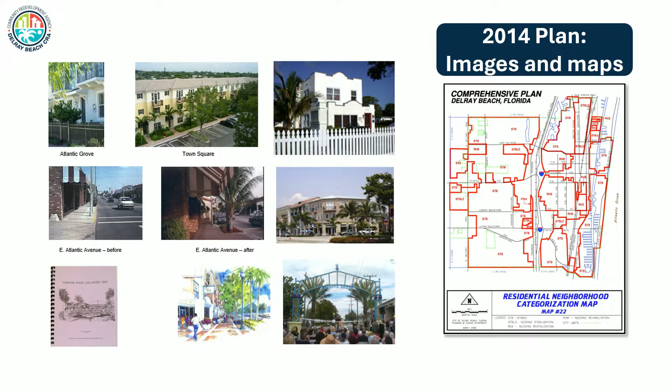Here's a summary of the updates to the maps, graphics, and project progress. So you'll see the cover — we changed that from the existing current plan of 2014 to the 2026 version. And here are some of the images in the maps and the updates.

So we still have the removal of slum and blight, land use, development investment. We changed that from economic development. We had a couple different sections that referred to housing, so we tied that all into one and titled it housing. We also have infrastructure and mobility improvements, public asset and facilities, and policing innovation is the one that is new that we added.

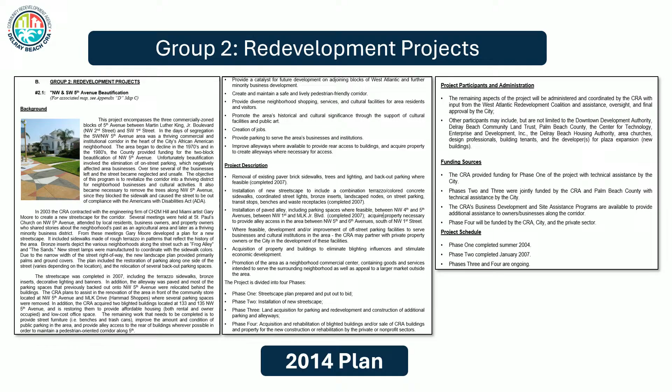And these are the redevelopment projects — this is what the current 2014 plan has for redevelopment projects. And then this is the table I just went through, in a larger format, where you can see the checks showing which goal each project is meeting.

Can you zoom in on those at all? I don't think so. Can I zoom? No? I don't think I know. Okay.

It's in the backup if you have the plan. It's in the backup of the plan.

All right, and the governing body. So the CRA was established in 1985. Palm Beach County also gave a delegation to the City of Delray Beach to oversee our CRA wholly and completely. So as a result, the Delray Beach CRA's governing body is given authorization to adopt by majority vote the 2026 amendment to the CRA redevelopment plan.

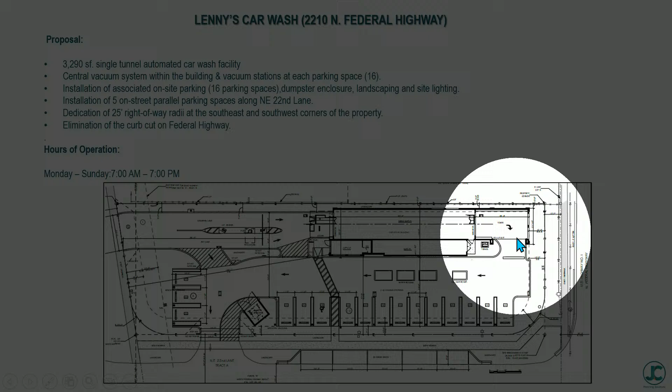There's also an alternate - if somebody decides they don't want to after they go to the gate, they can circulate out. So it's a one-way circulation system, perpendicular, with one point of egress. This is a little wider due to the waste management vehicles egressing in that location.

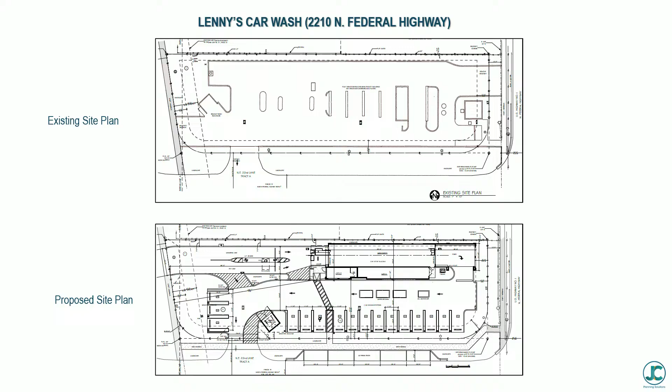There you see the existing site plan, and then we have the proposed site plan.

Required findings with regard to the conditional use: there's consistency with the site plan and consistency with the land use map. GC is the preferred zoning district with the GC land use designation. GC allows wash establishments, facilities for vehicles, as a conditional use. The floor area ratio is 0.16, the allowed max is 3.

The staff report confirms positive findings can be made with respect to the adopted level of service standards regarding concurrency, water and sewer, drainage, traffic, etc. The staff report also outlines consistency with the comp plan, specifically the neighborhoods, districts, and corridors element, the economic prosperity element, and the North Federal Highway redevelopment plan.

On the screen are some of the applicable policies that apply to this development proposal. I'm not going to go through each one - it's an excellent staff report and backup that was provided.

Compliance with the LDRs, conditional use findings 246A5. Positive findings can be made with regard to Chapter 3, as well as the findings for establishment of the conditional use - that it will not have a significantly detrimental effect on the stability of the neighborhood within which it will be located, or hinder development or redevelopment of nearby properties.

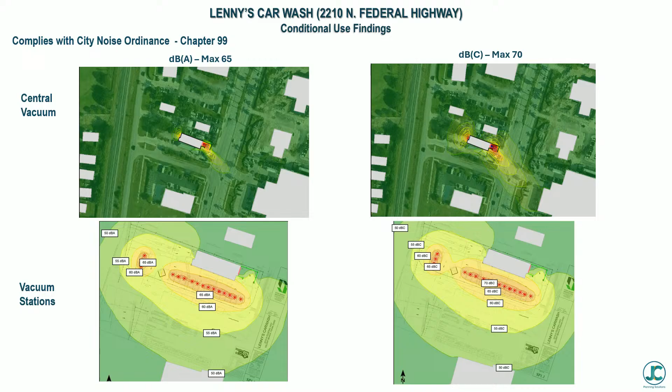As a result, once we received the staff report, there was some question with regard to the vacuum stations at individual spaces, so we had an additional analysis prepared. My apologies for not sending the staff the report - we'll ensure they receive it before City Commission, with a positive recommendation we hope. This particular analysis, on the bottom part, indicates those will not exceed the dBA either. So it's all in compliance with the noise ordinance, and there are no adjacent residential areas abutting, so positive findings can be made in that regard.

With regard to required findings on the site plan, the applicable standards for site plan action - positive findings can be made, listed on the screen. There's more detailed analysis in the staff report. The development proposal meets the applicable standards, and there are no identified areas of concern from the overall site configuration or proposed use on the surrounding area.

Compliance with the LDRs - it complies with the applicable standards indicated on the screen. It does allow as a conditional use outside storage, which ties in with the vacuums.

And so we've provided the evidence that those will comply with the noise ordinance and will be aesthetically appealing. With regard to the waiver analysis, we did request one, and per the LDR's.

Under 469D6D, when you have a 24-foot drive aisle, you have to have two-way traffic flow. This whole business operation is a controlled situation where you want customers coming in off of Dixie, go through the tunnel, egress on the southeast corner, and then go into the parking spaces, and from that point you exit the site. So we respectfully request in this case the one-way traffic flow.

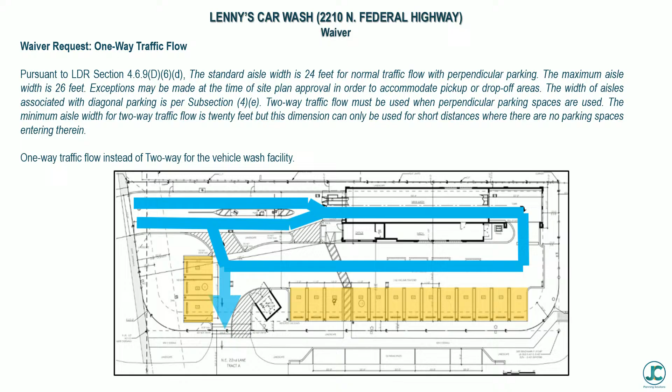We feel that positive findings can be made with 2411B5, that it would not adversely affect the neighboring area, would not significantly diminish the provision of public facilities, and shall not create an unsafe situation. This was really a controlled environment to make it a safe situation, and does not result in a grant of special privilege, in that the same waiver would be granted under similar circumstances on another property or for another applicant.

We feel it could be in a similar situation. There's not a safety concern, it controls traffic flow for customers and business operation, and does not affect the neighboring area. There are do-not-enter signs. Signage will be provided throughout the site, proper pavement markings indicating the proper flow, and do-not-enter signs off of 22nd.

The business model requires the need to provide those stations. The ideal would have been 21. It's a tight site, so we're going with 16. Typically, if you wanted to, you could have a diagonal, but we would have eliminated one or two more additional spaces. We feel as many parking spaces as we can get and accommodate the customers, the better.

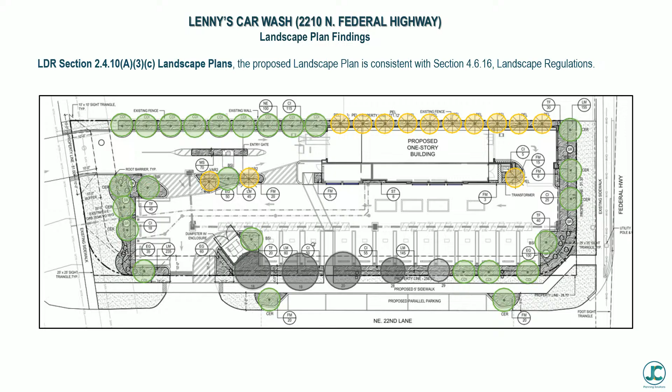And with regard to the landscaping, 2410A3C, positive findings can be made. We are preserving some of the trees along 22nd the best we can. We have our landscape architect here if there are any questions related to that. The site along the perimeter will be extensively landscaped and will be a significant enhancement to the North Federal Highway corridor.

And then with regard to the architectural elevation findings, the proposed Mediterranean Revival architectural style building, positive findings can be made for the criteria for board action with regard to 4618E1 through 3. Again, it's a very significant enhancement to the North Federal Highway corridor, repurposing and redeveloping this. It's the same use but in a different format.

It's an automated car wash facility, and we respectfully request your approval of this, or recommendation of approval of the conditional use and site plan. And that concludes my presentation. Thank you.

It's a new time record, Jeff. You're good.

Alright, so the request is for a level 4 site plan with a conditional use and waivers to allow a car wash in the GC zoning district. One waiver has been administratively approved by the city engineer, and further detail of the waivers will be provided later on the slides.

So the GC property is adjacent to other GC properties to the north and south, and automotive commercial to the east, and single family and community facilities to the west. The lot is currently occupied by a self-service car wash and is within the North Federal Highway Redevelopment and Overlay District.

Brief history: the site was annexed into the city in 1999 with a repair and truck rental shop. In 2003, the site was approved with the conditional use to have a car wash, and in 2005, the associated site plan was approved. As this is a complete demo, that is why the conditional use is now being requested again.

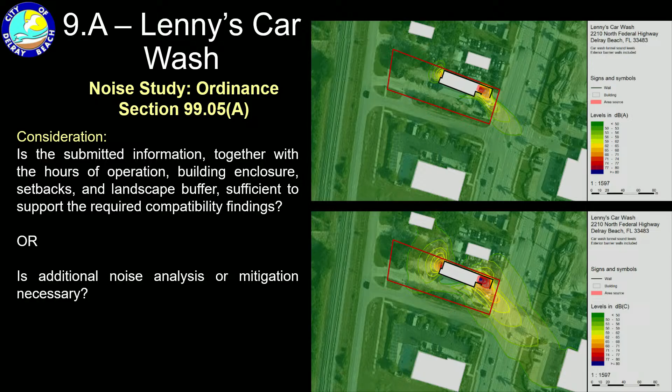So the board should consider if the submitted information together with the hours of operation, building enclosure, setbacks, and landscape buffers is sufficient to support the required compatibility findings, or if additional noise analysis or mitigation is necessary.

So the proposal complies with the regulations set forth in LDR section 449 and 434. The proposal also complies with the supplemental regulations, including lighting, parking, and bicycle parking. The provision for outdoor uses is considered with the conditional use and that findings.

The project complies with the landscape regulations set forth in LDR section 4616. The proposal includes the removal of 12 trees and 12 palms, with 5 trees to remain, 25 new trees, and 13 new palms.

So characteristics of the proposal include a neutral color palette. There's varied materials such as stucco and stone and a gray pitched tile roof. Overall, the proposed architectural style is generally compatible. However, it is noticed that the north facade facing the adjacent commercial property lacks that same quality of design proposed on some of the other facades and is kind of treated as the rear of the building with minimal design, although adjacent to another property. So that is something to consider too.

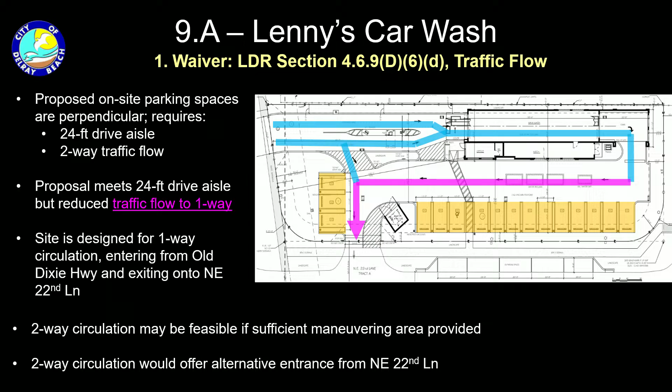The overall site is designed for a one-way circulation entering from Dixie and exiting onto Northeast 22nd lane. Employees and service vehicles will have to enter from Dixie and utilize that pass-through prior to the car wash gate, and then proceed to the exit on Northeast 22nd lane or utilize those 3 parking spaces for employees. Two-way circulation may be feasible if sufficient maneuvering area is provided, and the two-way circulation would offer alternative entrance from Northeast 22nd lane.

So the board should consider the following: will one-way traffic flow adversely affect internal circulation or safety? And is the two-way traffic flow a safer option? Or is the proposed operational maneuvering route functional for the site?

So the second waiver is to reduce the stacking distance from 100 feet to 88 feet. This request was already administratively approved by the city engineer. It's just here as a reference.

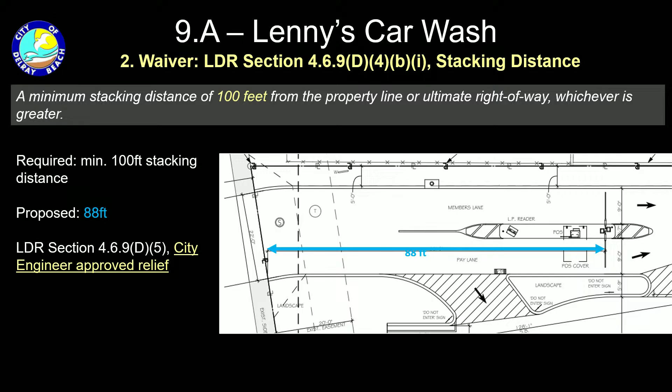The conditional use findings are as follows. The use will not have a significantly detrimental effect on the neighborhood, nor will it hinder development of the nearby properties.

The board should consider the following. Are the noise mitigations sufficient to reduce potential noise impacts, or is additional mitigation warranted? And is the proposed use intensity compatible with the area, meet community needs, and advance the overall vision, policy, and objectives for the city?

Great, thank you. At this time, public comment. If there's any members of the public that wish to come up and speak on this application, now's your chance. And seeing no one, then public comment's closed.

Does applicant or staff have any rebuttal, or cross-examination, any rebuttal? Not really, no. Just a couple statements, if I may.

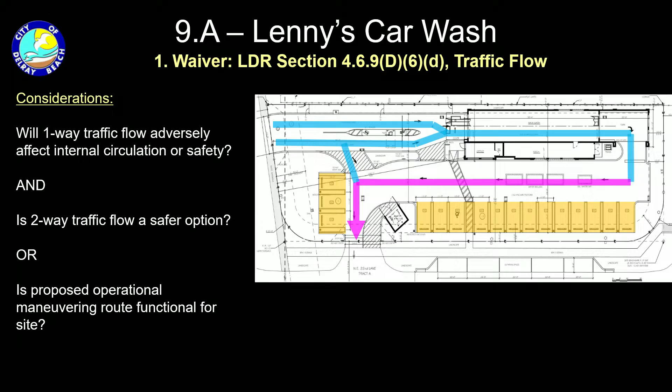With regard to the north elevation, along there it's heavily landscaped. However, if desired on that tower, if there were some additional stucco elements or features desired at that location, we could add it, since that's the closest to Federal Highway. When you get to the midpoint by the window, it's basically adjacent to that office building that really fronts Dixie, and you really won't see it. But there'll be landscaping along that north elevation.

And then also, while we could accommodate that desire, as the owner, we want people to go to the car wash, not to come clean their vehicles and then leave, vacuuming. So that's the business operation, is to come in, get your vehicle clean, and then that vacuum is an accessory use, a service that's provided, and then they exit the site. So that's all I just wanted to clarify.

Thank you. Sana, anything? No rebuttal from staff. Okay.

That puts us to board comments. Mr. Coe. Well, thank you. Was this the original Witherspoon site? Yeah, wasn't it? Right? Fantastic. Didn't we just name an avenue after the Witherspoon? Very appropriate.

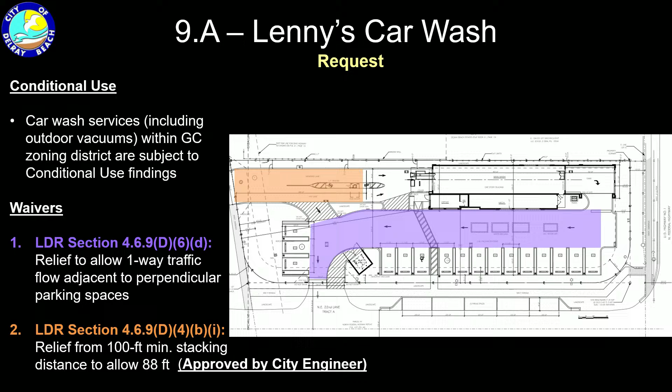Is there more water consumption with the automated car wash than if you go in with the wand? If you can imagine the technology I'm bringing to that site compared to a self-service car wash where customers are interacting and taking their time with older technology, there's actually less water used to wash a single car in the new facility compared to the current one. Okay, that answers that question.

Can you state your name for me? Lenny, or Leonard Pisciotto Jr. Last name, I'll spell it: P as in Peter, I-S-C-I-O-T-T-O. Thank you.

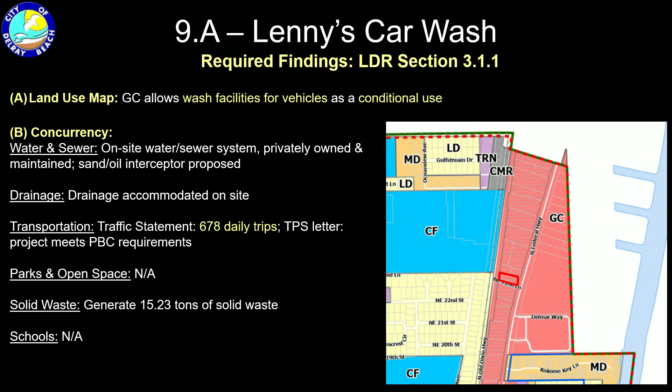I also agree with the one-way pattern, but what if somebody wanted to just go in and vacuum their car and they didn't want to get washed? In the model, that would be prohibited. The flow of traffic through the car wash is member-based, but for retail customers, the first time you're there you transact at the stacking area right before the tunnel, and each wash package includes the wash through the tunnel, the exterior of the vehicle, and stopping at the vacuum station to do the interior. So a member can't just go vacuum if they want? A member could bypass the tunnel and go to the vacuum station, but as a car wash owner, that is extremely rare. We do have 3 spaces that can be accessed without going through the car wash.

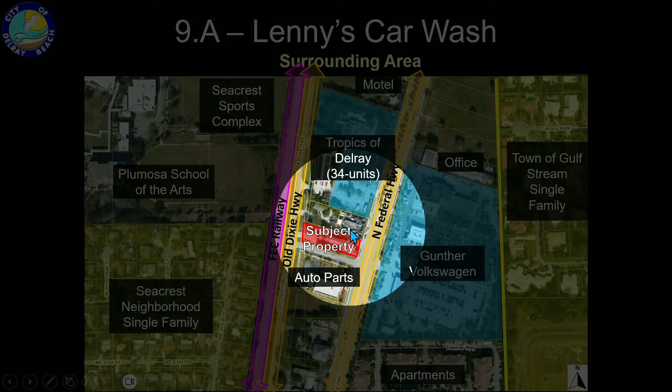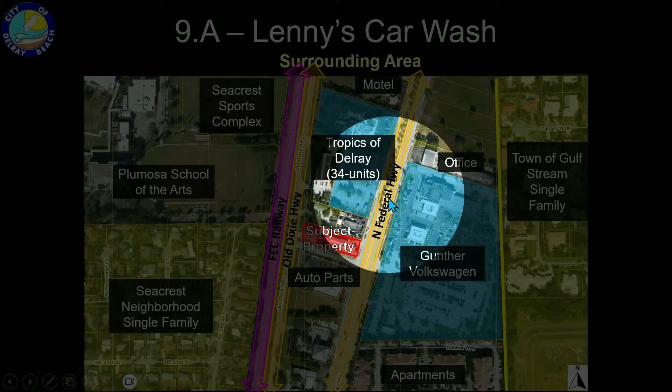Highways—you're southbound on Federal, you're going to see the north side of the building. As you're going 40 miles an hour, you'll go right by it. This is basically adjacent to Aubrey Auto. This is really where the tower would be, providing more of a decorative element, with extensive landscaping along that edge.

So are you saying you don't see the east elevation because you're going 40 miles an hour? From that perspective, coming southbound on Federal, that's the part of the building you'll see driving—you're probably not going to be looking to your right at the front of the building. But it provides that added pedestrian visual element. If you're a pedestrian, the sidewalk may not go through the facility, but there'll be landscaping on the east side.

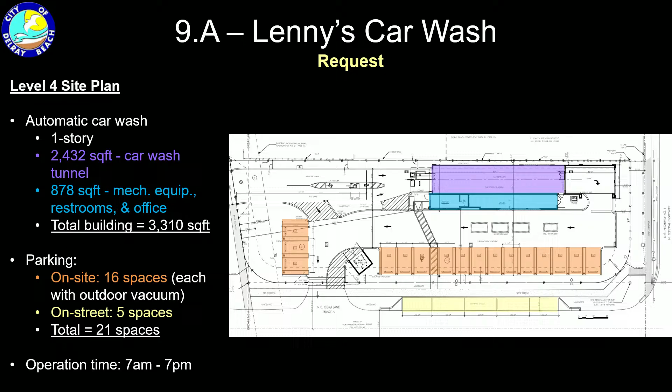Okay, could we look at the east elevation real quick? Yeah, that's really what I wanted to see. There it is—that's the east side, it faces Federal and has windows, giving it the appearance of the front. The north side faces up to the auto parts place. Got it, so make the north side look like the east side.

So stop the storefront from not going all the way down, like you have on the east—just a couple feet up, whatever. Aubrey Auto's probably not going to be there forever. Well, that's the whole point.

Right, so just in order not to disappoint Mr. Katz, here comes the landscape question. Get ready, I did have some plant questions. Uh-oh. It's always interesting trying to get these diagrams out and trying to see them on the computer.

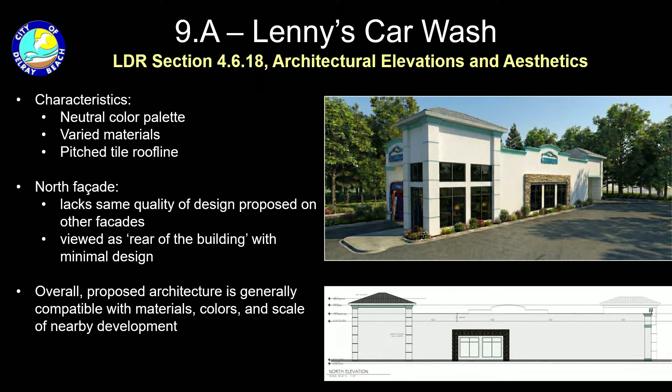As I read the mitigation box here, it says the total inches of removed trees is 30 inches. Is that 30 inches in diameter? DBH, yes—diameter breast height, that's the total of all of those, what, 19 trees or so? Yes.

They're not all that big. Well, the reason I'm asking is there are 25 new trees going in, measuring 37 and a half inches, and by my calculations that's a little bit over 1 inch per tree. In the proposed specs we have the 2.5 inch standard minimum specification for the trunk, times 25—but it would be times 15 because that's the inch-per-inch mitigation. There's 10 trees on a 1-to-1 mitigation. So 15 times 2.5 is 37.5.

Well, I'm just thinking of an individual tree—that's a small tree, 2.5 inch. Yep, the minimum standard for proposed trees coming in is 16-foot height, 7-foot spread, 2.5 inch caliper with 8-foot CT for the commercial property. Yeah, I saw that. Probably need to talk to the city about that.

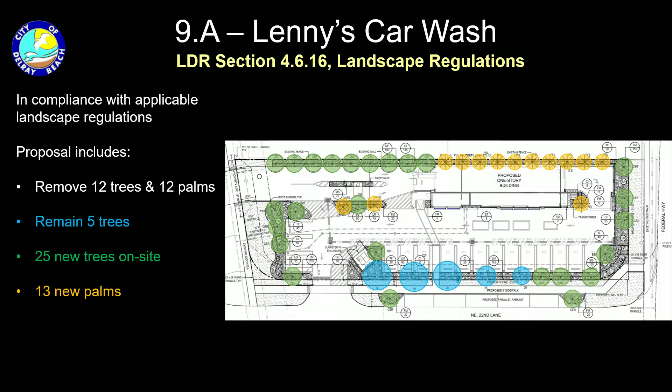My question is on the facades. I know we talked about facades. Can I see the west facade again? To me, that's an important facade, because that's the only area facing any residential. So it's hard to really tell, but it's pretty. So what you see, of course, this is the entrance, but that tower is what I'm talking about.

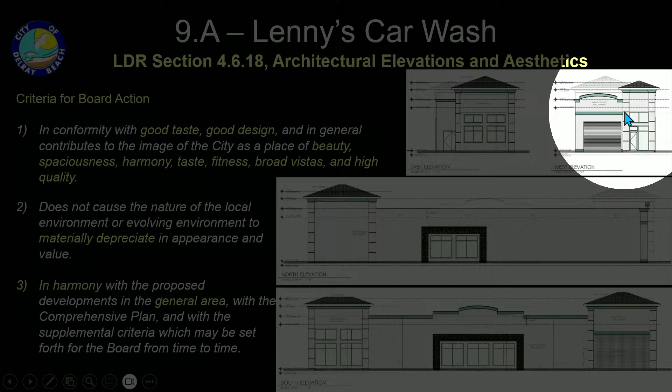Is that, can that be - that has glass, that's the office, and then above that is just white? Right, it's stucco with score lines. So, yeah, but is it to continue that tower element? I guess the seated windows go up to this point here. So they're pretty high, okay. They're up there, in line with that band.

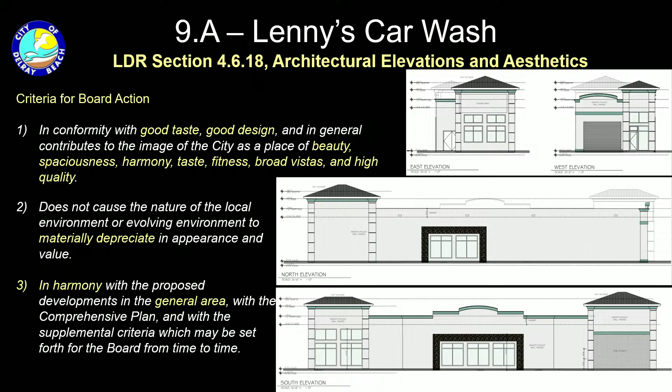'Cause I think that's even more important than the east elevation on Federal Highway, because it's hard to tell. It faces the railroad tracks, but the other side of the tracks is the only residential that it's close to. Yeah, which you can't even see the house from the car wash. You sure? Yeah, okay, I didn't drive there, but I looked on the map, I walked around, and it's behind a bunch of trees. It took me a long time to realize there was really a house back there.

Gotcha, okay. And that was my other point - I have no concerns with the noise because I believe there's not any residential close. That was our biggest problem with the last project, they were building it right next to it, and I think with the enclosure too, with the vacuums, that really helps as well.

I do have a question about consistency. You talked about the water, do you recycle the water at all? I know you said you clean it. I actually just happened to see a video - I guess all these car washes popping up in Las Vegas, where water is... I mean it's a resource here, but even more there, they're completely reusing the water.

And are you doing some internal system? Correct, and the technology is advancing every year, it gets better and better. So you're going to see all the reclaim system technology - they're reclaiming the water. And that's all going to be here at the new site. Absolutely. That's great, I think that's important because ultimately we are going to be in a water crisis here eventually as well.

Otherwise, I think it's great. I wish you guys would look at the corner of Military and Atlantic for something like this closer to me. But until then, we'll have something there at least. There's one little spot there, an open piece, but there was supposed to be one. They talked about where the bazaar was that's closed now and all that property. Who knows what's going on? Anyway, that's a great commercial area for it.

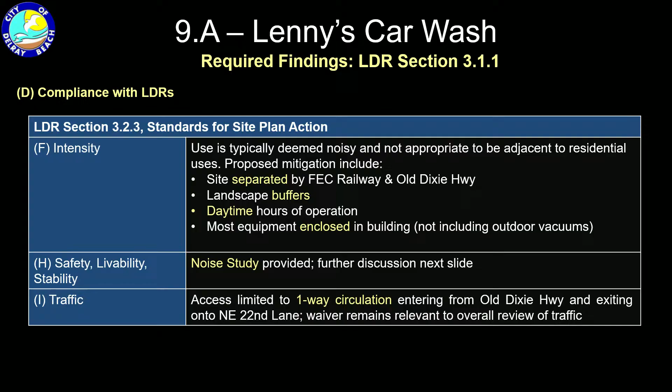The reason I went and got my car washed out at Atlantic and Jog is just to see what the noise is like and what the operation's like. The noise is from the blowers that dry the cars, not from the vacuums. The vacuum itself is inside the building. Apparently there's some noise that comes with the hose when you activate it, but I honestly didn't hear anything.

Yeah, I think that's something everybody needs to be conscious of when looking at a car wash. But this particular wash has three sources of noise. You have the blowers that dry the car, which is your standard, biggest noise, and we addressed that creatively through my team. Then the other two sources are what we call the central vac system, which produces the suction each customer uses at the parking spots. That is encompassed inside the building with insulation to muffle that sound. Lastly is the noise from individual vacuum stations, or vacuum booms, and those are really not even a concern.

I always give the analogy: if you take your shop vac at home and put your hand on the actual unit, it's silent, right? Most of the time if it's not being used, it's hung in the hanger. When you take it out to vacuum your car, yes, it's going to make a bit of noise, but nothing more than that vacuum you're using to suck up water at your house.

That's the impression I got. That one at Jog doesn't have the self-service, that's full service, right? Is that a different model? Yeah, but again, same equipment, we're just using it with our employees, as opposed to here where the customers are interacting with that same equipment.

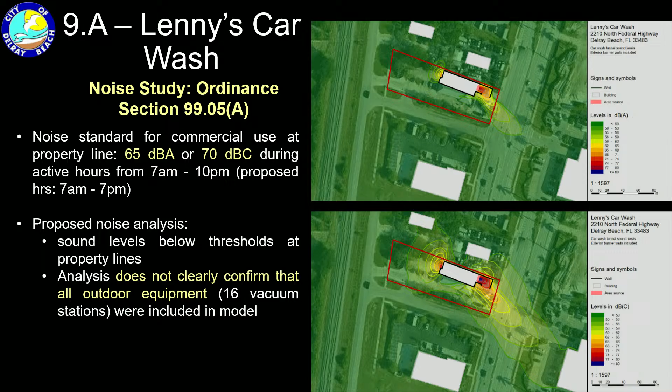Let's get a motion. I recommend approval of a level 4 site plan application with architectural elevations and landscape plan, including a conditional use to allow a 3,310 square foot automatic car wash at 2210 North Federal Highway, and a waiver for one-way traffic flow adjacent to perpendicular parking spaces, by finding that the request thereof approval is consistent with the comprehensive plan and meets the criteria set forth, with conditions of changes to the north facade, as set forth in LDR section 2.4.6A5 and the land development regulations.

Second. With the second, you got to make mention of the addition of the facade. I said the north facade is part of the conditions, yeah. Any other discussion on the motion?

We have a motion by Mr. Katz, second by Mr. Chard. Ms. Miller, would you please call a roll? Jim Chard, yes. Mitch Katz, yes. Roger Cope, yes. Karen Gieseleski, yes. Dick Strong, yes. Price Patton is absent. Gregory Snyder, yes. It passed unanimously. Good luck, thanks to staff, very nice.

I would advise maybe a little presentation, an instruction manual for us Tesla owners, saying here's what you need to do - there's a car wash mode. I know, but then putting it in neutral, it's still like I don't know. Anytime I've gone, it freaked out. Just don't wash your car. Oh yeah, like what is it?